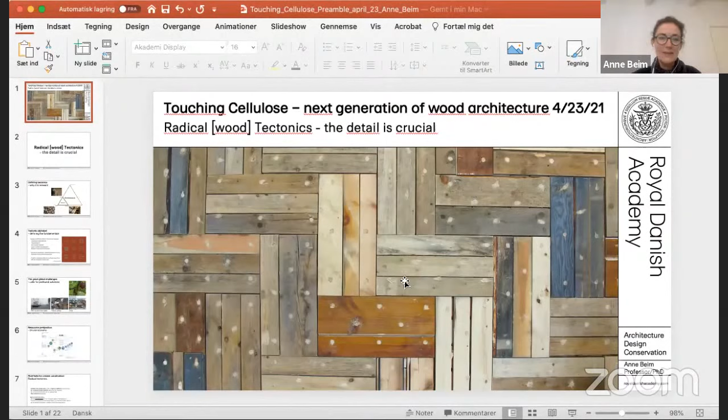It's okay. Yeah, I have about 20 minutes to talk about the concept of radical wood tectonics or radical tectonics. And I chose the subtitle, "The Detail is Crucial." And I'll go through a number of different projects and, how could you say, questions that are on our minds in our research center, which also made this the reason why Gilbert and Pierre also reached out for us, very much helped by Ulrich Knaack to begin with, but that's how it all started.

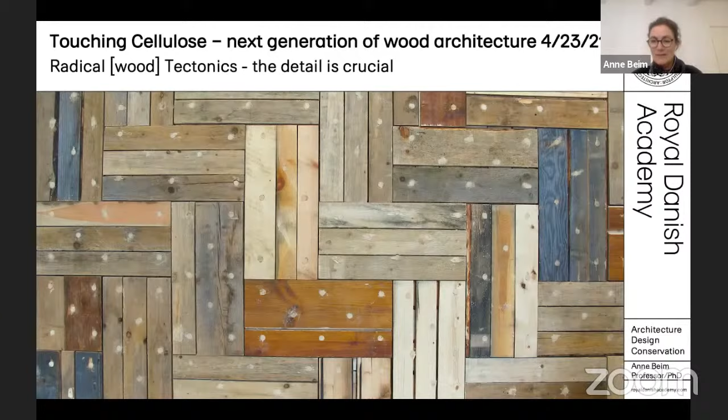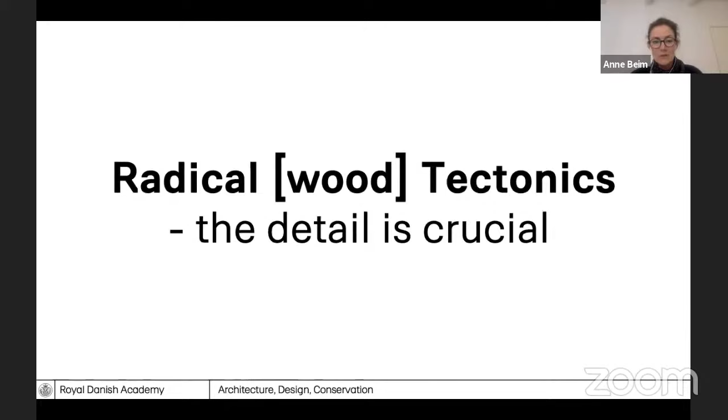So yeah, radical wood tectonics. I will talk about projects or ideas that have been dealt with in our research center. We also have tested indirectly with students, and we were very much looking forward to go deeper into this in the workshop in the fall. However, before I start, I just want to make sure that we know what we're talking about when we're talking about tectonics, not to say that there's one definition, but also to emphasize why it's relevant.

We define tectonics from our end as part of architecture. It's not pure technical, it's not aesthetic, but it's like a subdivision of architecture as shown in this figure. So it still sort of includes the three main concepts defined by Vitruvius: the firmitas, the material; venustas, the aesthetics; and the utilitas, the functionality. However, when we speak about tectonics, it's about the material, the form, and the technique, and how these three means are sort of ending up, that defines the tectonic.

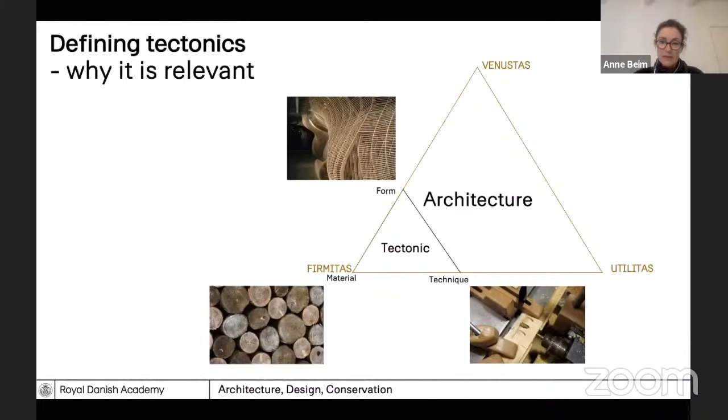As part of this, we have been working in the center over the years, and one of our former PhD students and now one of the teachers in the program also has defined what we call the tectonic alphabet. But just to line up the fundamentals, we say that tectonic in architecture defines the correlation between the fundamental architectural idea, the overall idea, the material properties, the form principles, or the anatomy of the full building or the structure, the choice of building technologies, and the structural rules present in the construction.

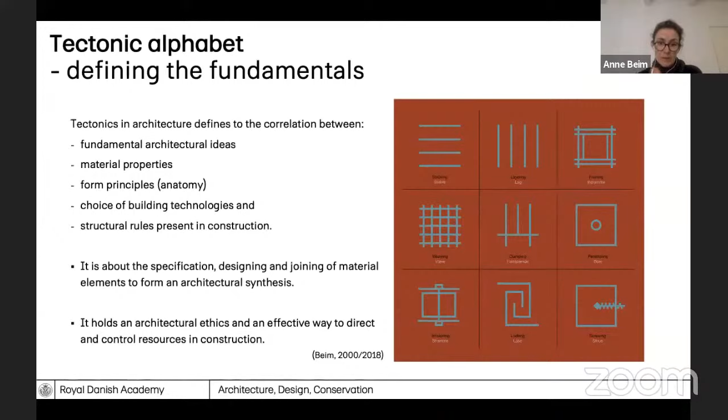So it's also about specification and designing and joining of materials to form an architectural synthesis. So it holds an architectural ethics and an effective way to direct and control resources in construction. And I think the former lecture just showed that very, very elegantly. So the image on the right is just a small brief example of the various tectonic principles that could be stacking or layering, weaving, clamping, tensioning, or locking. And why these principles are important is also something I'm going to go into more detail with in presenting the projects later.

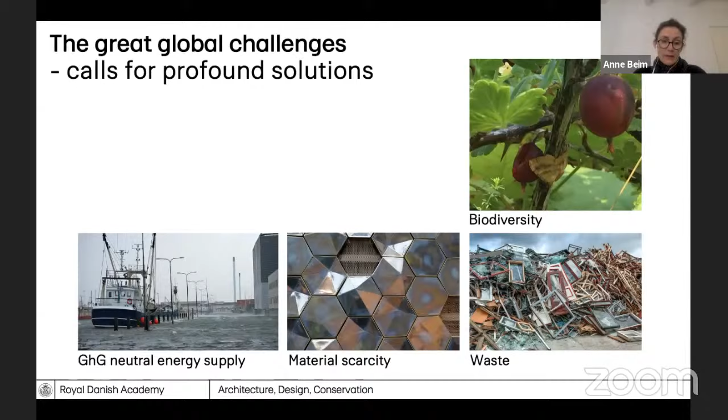But just to start out, one of the largest problems we are facing these years, everyone is talking about it. Fortunately, it took some years, but I think over the past 5 or 7 years, it really has accelerated. But the ecological crisis worldwide is now calling for profound solutions. So we have to find all different kinds of technologies and ways and ideas that have to be launched in order to help solving some of these problems also mentioned here: the biodiversity, the problem of waste production, and of course the material scarcity, and not the least the greenhouse gas neutral energy supplies have to be rethought.

So from our end, it has meant that we have been, in the research center, very much looking at circular principles, or how to apply materials and look into the construction industry from the end of having the material and the value of the materials in the loop, both in the technical loop, the technosphere, as well as the natural loop of resources, the ecosphere.

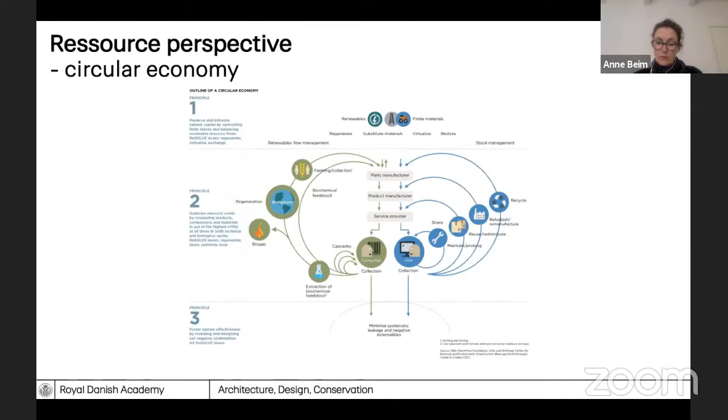So it's from that end we, in 2017, were part of an exhibition where we were testing some of these ideas about the radical tectonic and how we could apply the tectonic thinking as a way to approach this very sort of strict understanding of materials and the way they were to be included in various structures.

We wanted to use uncontaminated or non-toxic materials that should not be further treated. And we wanted to apply construction joints that could be disassembled, designed for disassembly. And also we wanted to reduce the waste in production. And this meant that we had to leave out the demand for non-renewable energy in the production.

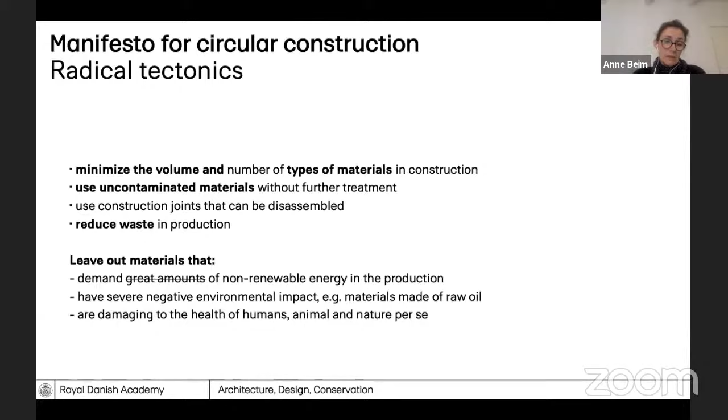And we had to leave out, because they have severe negative environmental impact, materials made from raw oil. And we wanted to leave out materials damaging to health, humans, animals, or nature per se.

So we ended up defining 3 walls. They were thought of as generic wall structures in the sense that they were conceived and built according to regular building regulations in Denmark. So we are applying proper materials that perform according to the regulations, and we wanted to use regular standards and building procedures as we meet in the construction industry. However, I'm going to just talk about the wooden wall due to the theme.

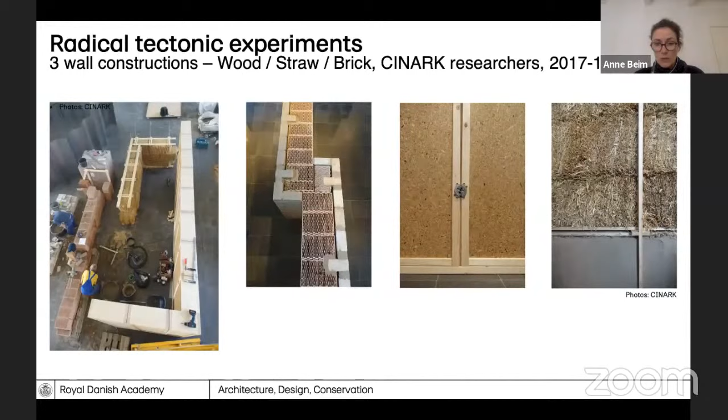Well, just before I do that, as part of our initial preparation, we were also defining what we later called the construction material pyramid. The first one we applied for the project was smaller than this and only included the materials that we applied, but then we have developed it into this larger pyramid including 60 materials, and it's now digitalized and accessible on the web.

But in one way, this was also a tool to do the very strict selection of materials, by which we could have the lowest possible CO2 emission, the lowest possible energy consumption, and the highest possible lifespan of the materials, and of course also simplicity in the number and the types of materials, with a high focus on bio-based materials.

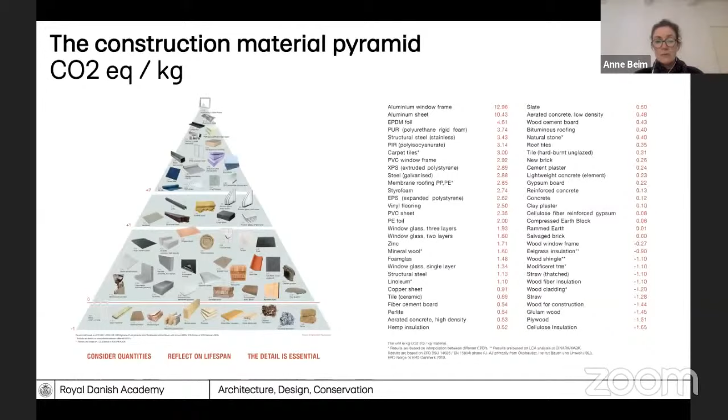So as for the wall principles, we tried to stay strict to the industrial standards, also to omit or limit waste production. We applied regular structural elements, such as a specific OSB board and regular pure wood beam structures that were cut up into regular pieces, and then we made these separate wall elements that could be joined by these clamp details that were added on each of the elements.

And as you see to the right, this is where the Tectonic Alphabet comes into play. We are using the Tectonic Alphabet as a way to direct and focus the discussion about the various specific technical solutions. And to the very right, you see the technical specifications of how the structure is actually built. So this is the final drawing of how it was actually built.

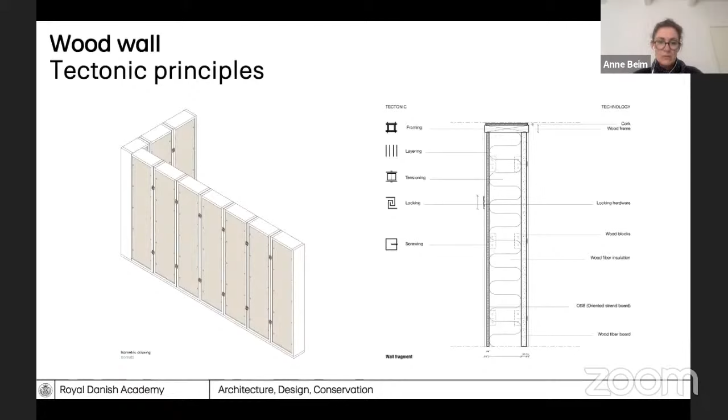Of course, under construction, there were many different iterations and versions of similar ideas. But the Tectonic Alphabet helped us to keep on track and also to end up with this final production.

So to show the tectonic principles here, the materials used were stainless steel, solid wood, and boards made from wood without formaldehyde. We wanted to keep the toxic level very low. And as mentioned, we used the standard sizes of the OSB and determined the wall elements and dimensions to avoid waste from assembly.

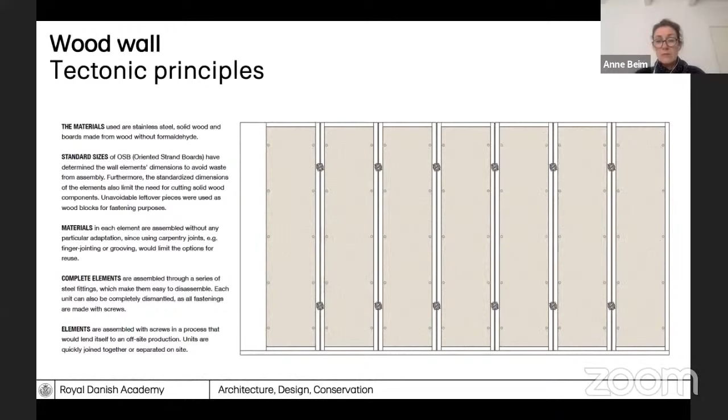And also the standardized dimensions of the elements limited the need for cutting the solid wood components. So we only had very few cutting procedures. So in total, we wanted to keep the elements at a very high level in terms of design and also the component itself, so it could be both disassembled and reapplied at full scale.

We'd also try to mimic the processes that could be translated into an industrialized process by very, very few procedures, and the elements had to go through similar structural features.

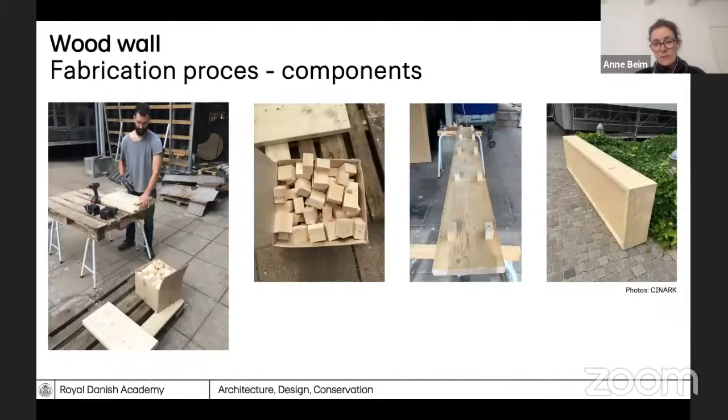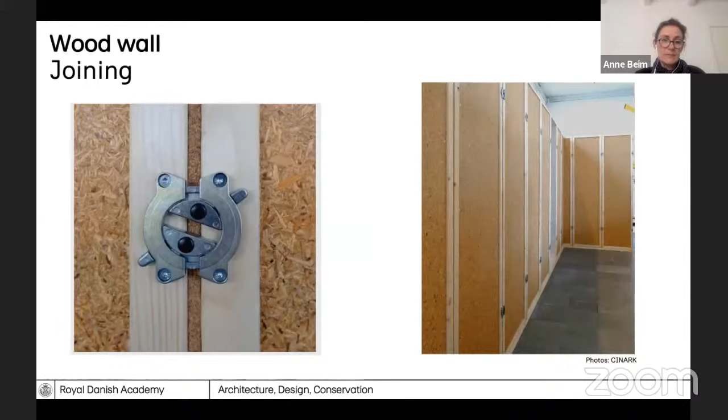And here we see the steel brace that joins the elements, which also becomes sort of an ornament defining the wall surface, and also holding the two elements together across a cork plate or membrane.

So as for a life cycle scenario, we tried to see or at least estimate how these different materials could be reapplied over the years, and we have here the different life cycles depending on the material itself. Of course the screws and the fittings are maybe the ones that would have the longest lifetime, whereas the boards and the solid wood would have a shorter lifetime.

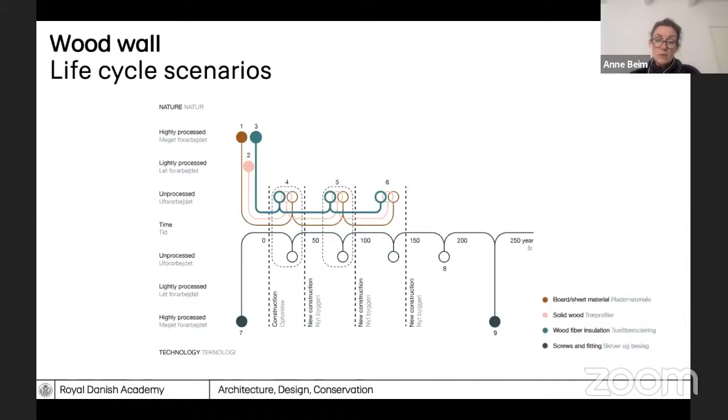The other example, because the one I just showed was, of course, if we apply new or fresh wood, is from Nordby, with whom we have been working closely over the years, who's now working for Asplan Viak. She did a PhD project almost 8 years ago, where she looked into what she called salvaged materials in architecture. And she developed what she calls the Stavne timber block based on waste wood from demolition.

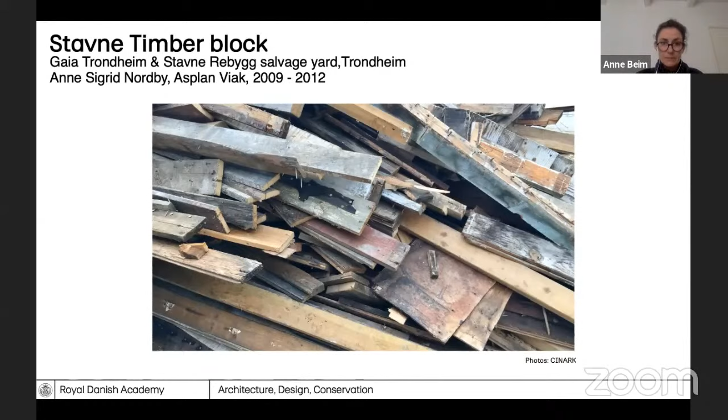What she did here was she took wooden boards, mostly floorboards, and cut them into smaller pieces, and then made these wooden blocks that could be stacked on top of one another. The boards would be held together with dried wooden nails, dried in the oven and hammered through the block. And when expanded, when exposed to regular humidity, they would hold the block together.

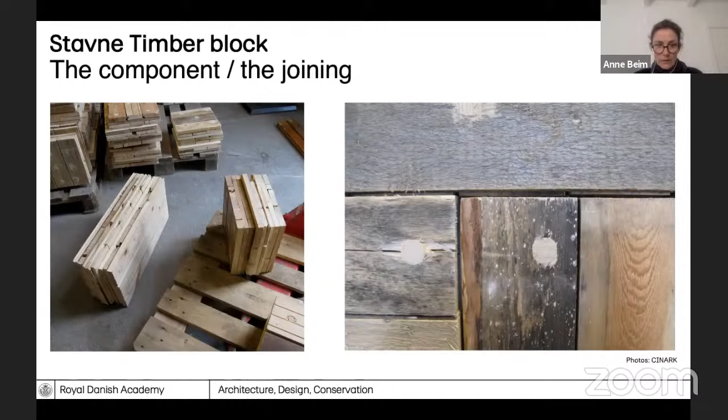So she made this sort of new wooden brick or wooden block that could be stacked for various wall structures. And here we see one of the prototypes in which she tested the system. It was also an idea she wanted to apply using unskilled labor to fabricate these small blocks for later use in industry.

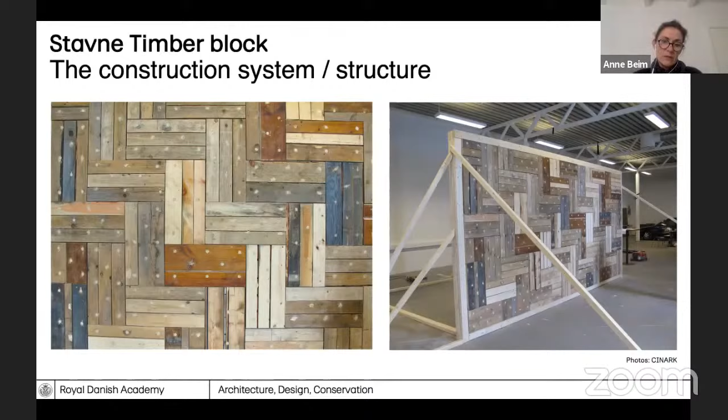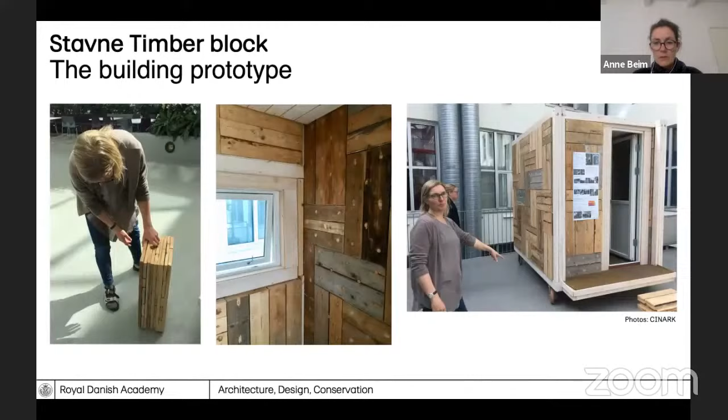She has now tested it in a small prototype, so she keeps on developing the idea further. It hasn't yet been tested in a full structure, only in small pavilions like this. However, she has been involved in a project together with a colleague of ours who's one of our teachers, the Nordic Built project called, I can't see the title here on my screen, but the New Nordic Wall. And it's also based on this waste wood product.

In this, they tried to develop it for regular structures. However, it's only secondary structures because it has problems with the statics of the structural element. So they claim here that the massive waste wood component is the building material of tomorrow. What they were concentrating on in developing this component further was that it had to be module based, small or medium size, so that 1 or 2 persons could handle it, it had to be based on low or medium advanced technologies, and finally it had to be produced locally.

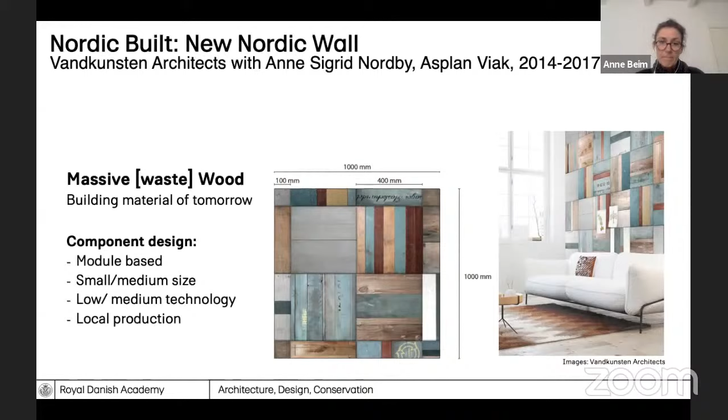So what can we learn from this across the various ideas and projects, and where do we have to get started for the launch of this workshop in September? We would definitely recommend that you choose an overall strategy, what to focus on, maybe write a manifesto. It was very helpful to us. And you have to define the principles, the design rules and fabrication methods you work by, to make it feasible. And finally, of course, cherish the world of details. Use your fantasy and draw and test and model one-to-one. That's something which has really been a great world for us to dig into.